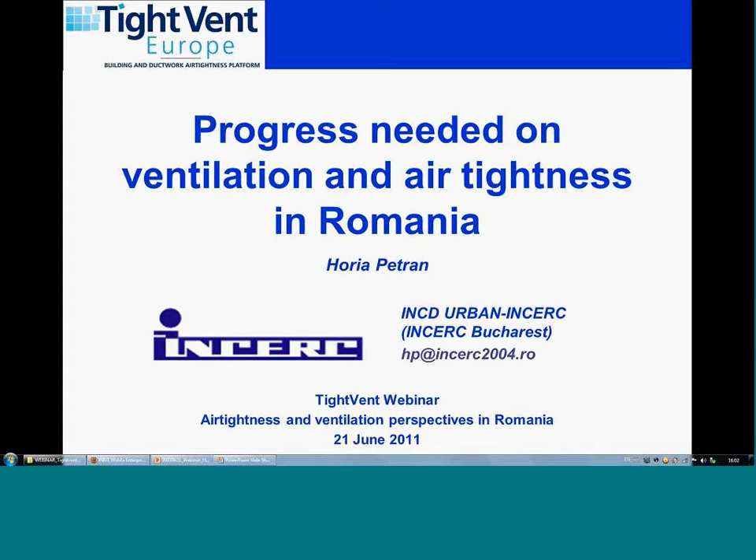The content of my presentation will focus on 4 major issues: the airtightness of the building stock in Romania, the potential impact of ventilation on energy performance of buildings, numbers on Romania, the envelope permeability, indicators for quantitative and qualitative evaluation, and testing methods and current investigations used.

The second one: ventilation use issues in rehabilitation programs. In the activity of improving energy performance of existing buildings, the context and the schemes used for the national thermal rehabilitation program, the key actors involved and their influence, and the impact on air quality.

The ventilation of low energy buildings and nearly zero energy buildings is, as you may know, very important. I will try to emphasize some requirements and the weight of ventilation in the energy balance compared to the current practice in our existing buildings, and what solutions we can imagine for this kind of buildings.

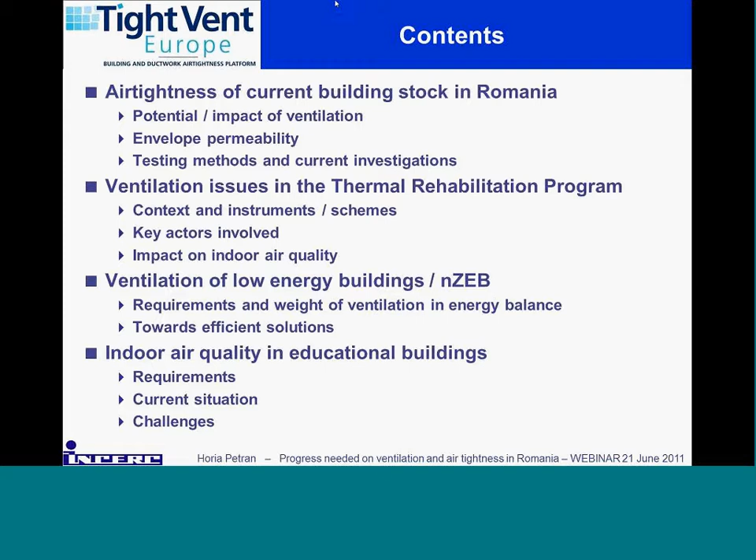Last but not least, indoor air quality in educational buildings, which is a very important issue: what are the requirements for this kind of buildings, the practicalities, the current situation, and the challenges, equally for energy efficiency and for indoor environment.

First of all, in order to evaluate the potential impact of ventilation on energy performance of buildings, one should take a global look at the numbers related to the building stock in Romania.

According to the Romanian National Commission for Statistics, a total of approximately 8 million housing units exist in Romania, serving a population of more than 22 million people.

The total residential buildings number around 5 million, with a total useful area of more than 450 million square meters. Of the 8 million housing units...

3.1 million are situated in around 84,000 blocks of flats, which make up 70% of the building stock, primarily located in urban areas. These building blocks make up, as I said, 70%.

These figures evince the great impact of retrofitting buildings in order to reduce energy consumption.

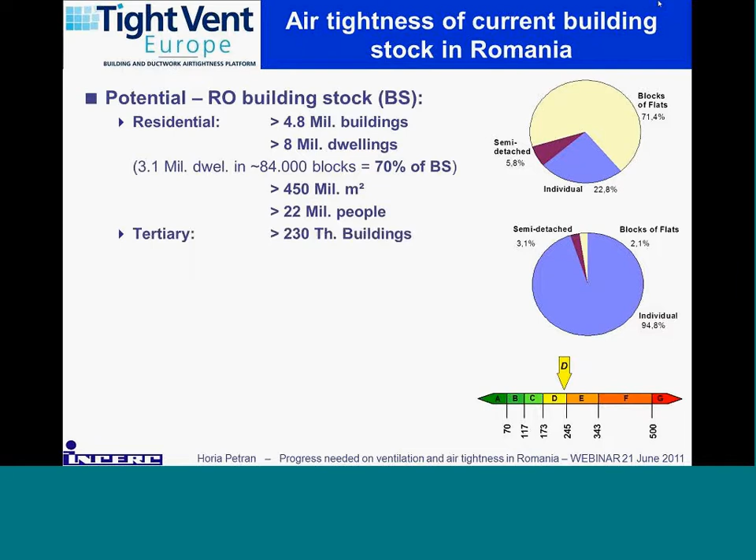The non-residential building stock consists of more than 230,000 buildings, serving more than 70 million square meters.

The energy performance of the building stock varies between 100 and 300 kilowatt hours per square meter per year, depending on the building type and climatic conditions.

It's necessary to say that Romania has 4 very different climatic zones, with extreme design temperature for winter between -12 and -21 degrees Celsius, and yearly average external temperature between 3.6 and almost 12 degrees Celsius.

Analysis of urban buildings and their energy efficiency, performed with the strategy of Bucharest, focused on more than 800,000 dwellings plus non-residential units, showed that the global energy consumption for space heating alone is around 8 terawatt hours per year.

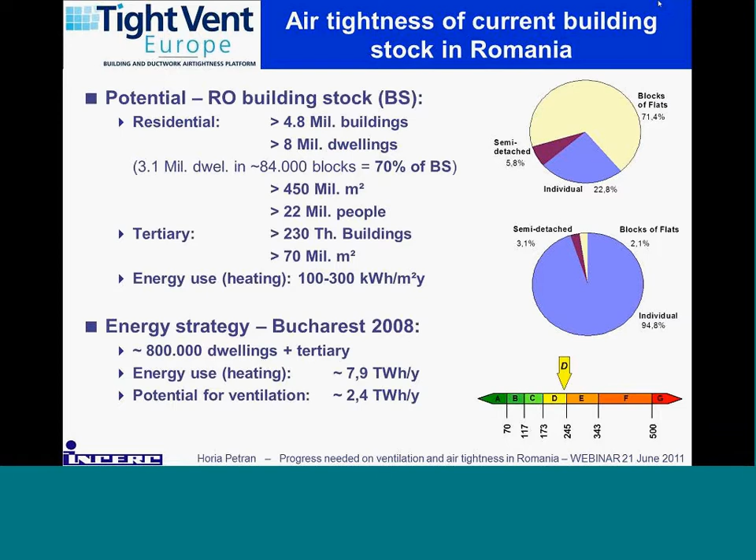Taking into account the usual ventilation share in the energy consumption for heating, we can estimate that more than 2 terawatt hours per year in Bucharest alone can be of major interest.

Most buildings do not have mechanical ventilation. Infiltration is the dominant source of ventilation for dwellings in Romania. With the exception of very limited kitchen or bath exhaust systems, most buildings in Romania do not have mechanical ventilation, and therefore they rely on infiltration, leakage, and natural ventilation through window opening in order to maintain acceptable indoor air quality.

On average, over long periods of time, for building stock with existing windows, the requirements of fresh air can be met, but uncontrolled infiltration leads to very high energy consumption and sometimes thermal discomfort due to cold drafts. On the other hand, for buildings with airtight windows, indoor air quality is often not ensured by envelope infiltration, with bad consequences such as moisture condensation at thermal bridges causing the formation of molds, which affect the health of occupants and building materials as well.

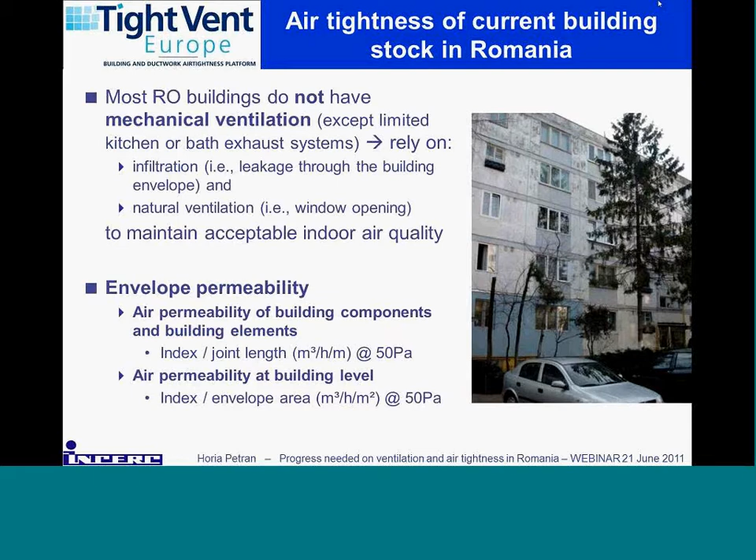Regarding envelope permeability, this is usually expressed by indicators like air permeability of building components, an index normalized to joint length at 50 Pascal pressure difference, or at building level, an index showing permeability reported to the envelope area, also at 50 Pascals, or reported to conditioned volume as air changes per hour.

There are many more or less standardized testing methods and investigations used for assessing the permeability or tightness of the building envelope. The most well-known is the blower door test, the fan pressurization method. Thermal imaging, or thermography, is also used as a qualitative investigation to detect air leaks. There are also various ventilation system functionality surveys and surveys on indoor climate.

The blower door test is sometimes limited by the costs of implementation and the relevance of the results. If we're talking about condominiums, collective buildings, where the air exchange of the apartment with the external environment is made through the staircase, which is a common volume to the building, shall we test the whole building, or find a representative apartment for testing?

Tests performed on 79 windows in the laboratory for thermal protection of buildings within INCERC showed a large variation of air permeability index, limited to less than 1.5 cubic meters per hour per meter of joint length at 50 Pascals. The average is around 0.50, and these results are characteristic for the current insulating windows market, not for the existing building stock.

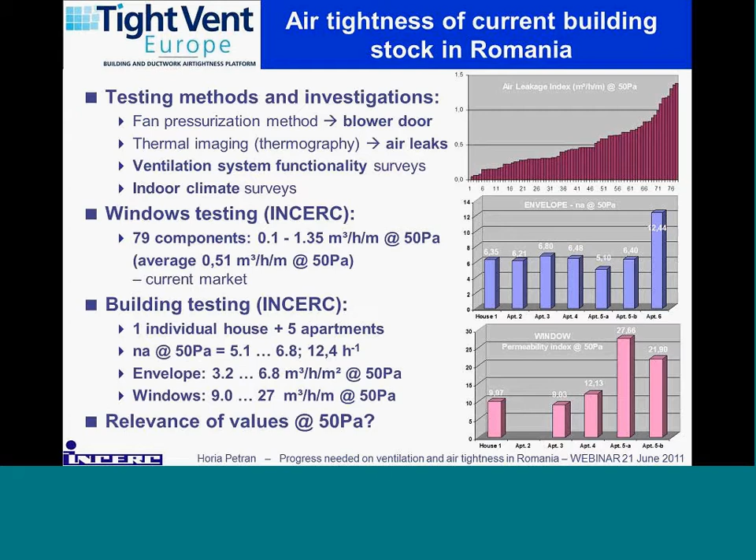For the relevant issues in the thermal rehabilitation program, as context, there is an overall need to increase energy efficiency in Romania as well as in Eastern European housing, where in Romania the building stock for housing is more than 95% private ownership. This is a broadly recognized fact. Although solutions for this issue exist, they are often executed in chaotic and unregulated ways.

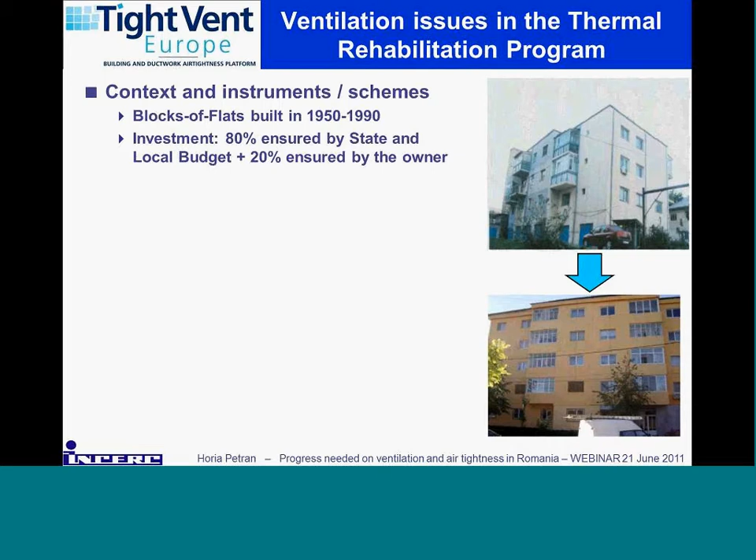Starting in 2002, an ambitious national retrofitting program targeting energy performance of buildings was launched in Romania, supported until now by general state and regional subsidies. More than 80% of rehabilitation works and 100% of energy audit and design activity are financed by the state. However, priority is given to improving thermal insulation, while the indoor environment with regard to comfort, health, accessibility, safety, and so on, but primarily indoor air quality, is somehow neglected by not providing any subsidies for that.

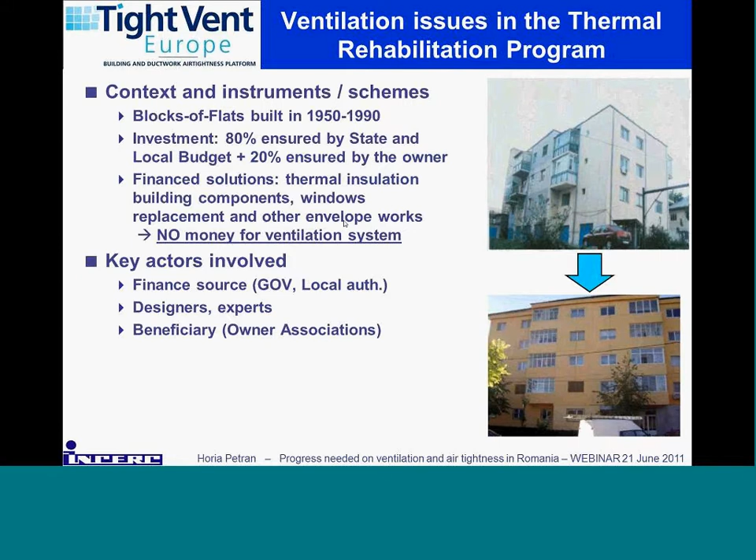Major key actors involved in the rehabilitation process should be aware and trained about the importance of ventilation issues and risks, and also about the impact of bad ventilation on indoor environment quality. I have confirmed in many cases that indoor air quality was lowered while thermal insulation and air tightness were improved. With increasing concern about energy consumption and conservation, building envelopes are becoming more airtight and consequently contributing to an inadequate environment.

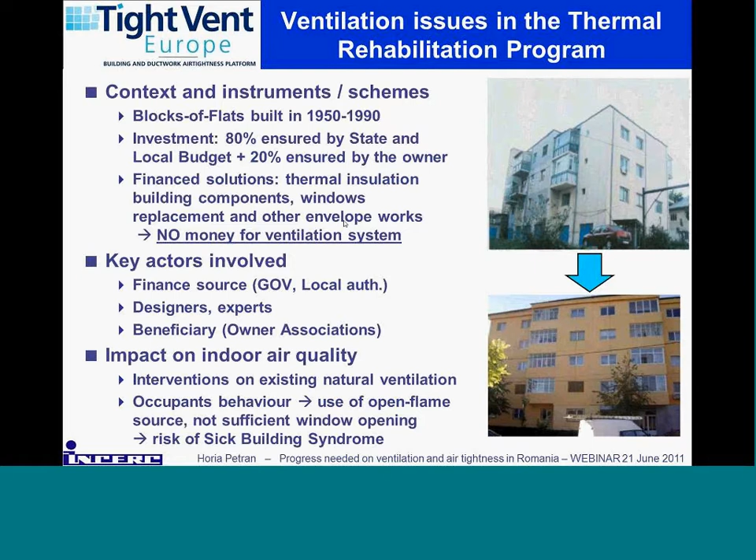Actually, the need for natural ventilation is not taken into consideration when increasing the airtightness of the building. Now, I'm afraid, serious problems have surfaced concerning the indoor environment and air quality. Those problems are increased by the behavior of occupants trying to cut down heating costs. They use alternative fuels, even open flame heating sources including cooking machines, which increases moisture condensation and the concentration of harmful gases like CO and CO2. The additional emissions from surface materials like furniture and finishings, in the context of irregular or no ventilation of occupied living space, cause an increased incidence of sick building syndrome.

From the crude reality to the far bright future, as building very low energy buildings, very efficient buildings, passive buildings, and nearly zero energy buildings. What is very important to emphasize, and it was also emphasized before,

these would have a very tight envelope. They should ensure a controlled ventilation, especially in highly airtight buildings, the airtightness of that ductwork to be ensured by appropriate technologies and skilled installers also. The heat recovery efficiency should be more than 80%, and this is a must.

Another aspect of these buildings is related to the weight of ventilation in the final energy use of the building. For example, for a typical existing residential building, the weight of ventilation in the energy use is in the range of 15, maybe 30%. For a very low energy building, this can be more than 50%, which increases the need to properly solve the energy efficiency in ventilation systems.

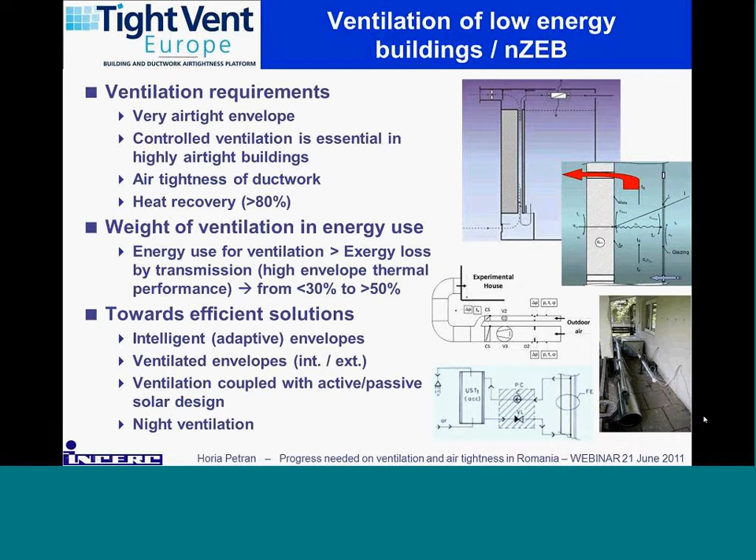So just pointing out some efficient solutions. First of all, it's a ventilated envelope system. It's a concept of wall with parietal dynamic effect on the exhausted air from the occupied spaces. The functional principle is quite simple.

In the winter and during the night in summer, the air to be evacuated from the occupied spaces is circulated by the air gap, which is formed within the wall by applying a very common low resistance layer like a gypsum board. During the night in summer, the external cold air from the outside is intensively circulated through the air gap, providing in this way a cooling surface to the conditioned area. In fact, the variable envelope thermal resistance is very high in winter and very low during summer nights.

So this is what I said about the adaptive envelopes. Another solution is a ventilated solar space, which is applied in the experimental house within INCERC and was studied there some years ago, which is used for preheating ventilation air mainly during the heating season.

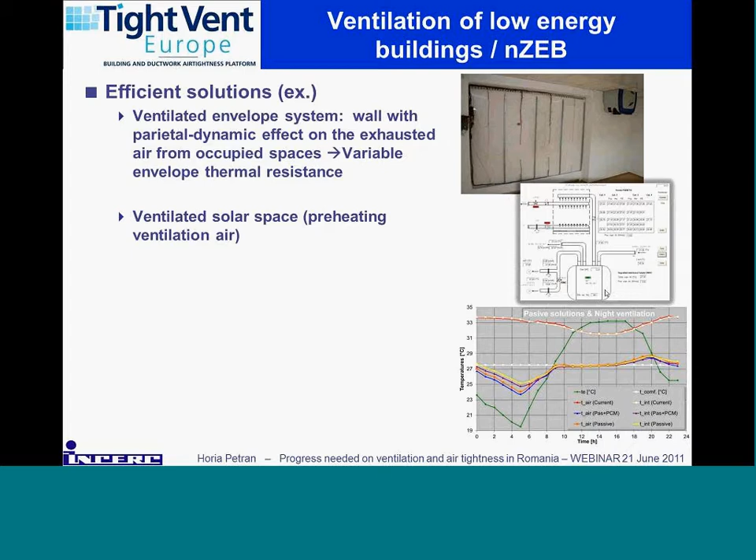Another solution should be the use of active or passive ventilated facade, as well as for new buildings and for refurbishment solutions. One idea is to use PV panels as active covering and preheating the fresh air while cooling the elements of the photovoltaics.

Other solutions should be the use of so-called passivation solutions to increase the energy performance of a building and simultaneously use night ventilation in summer. Night ventilation can be used for cooling passive and active elements like building mass, activated building systems, and use of phase change materials. If you look at the graph below,

this is presenting a thermal response of a top floor apartment, southwest oriented, on a typical day of July in Bucharest, taken from the reference year. Compared to the 32-33 degree real situation, the application of very simple passive solutions with a proper ventilation strategy can lead to acceptable comfort without cooling energy. This test includes also the PCM effect.

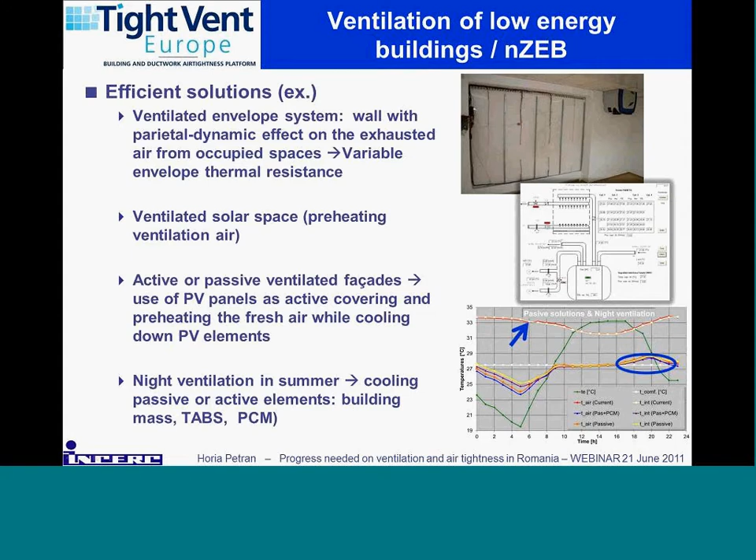Moving forward to a very delicate aspect, which is ensuring indoor environment in education buildings. What is to say is that ventilation practice for occupied spaces in schools or public buildings differs from those for residential buildings.

Studies on indoor air quality, ventilation, and building-related health symptoms in schools have shown that ventilation is not adequate in many classrooms and was considered the main cause of health symptoms. Moreover, other research shows that poor indoor air quality in schools can cause a reduction in students' performance, whereas good quality in classrooms can enhance children's concentration and also teachers' productivity.

Therefore, the ventilation requirements are focused on minimum airflow per person, and ventilation needs are in reality much higher because of people concentrated in closed spaces over extended periods of time, and the ventilation rate has to be assessed for adaptation to the dynamic occupation. So there is a need for intelligent ventilation systems and for energy efficiency, and in this respect there is a need for low ventilation during long breaks and holidays.

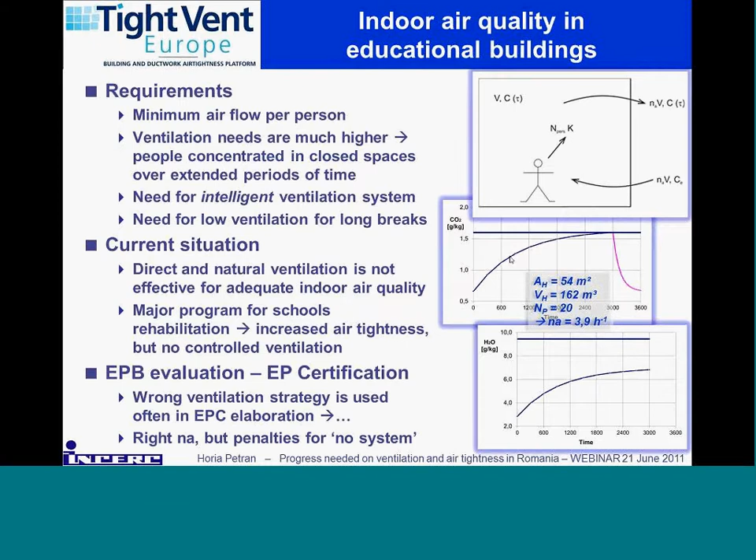The main challenges for ensuring a high quality environment in educational buildings are, for energy performance evaluation, to detail and clarify existing regulation on ventilation and energy performance certification, which is not very clear right now. And for the key actors involved - architects, engineers, designers, energy auditors, inspectors, and all technicians - to ensure the needed qualification level and proper knowledge on ventilation impacts.

If we're talking about government, the Ministry of Education, the local authorities managing the rehabilitation program for schools, the inspectors, the teachers - raising awareness is needed, which in this particular case of educational buildings can generate further impact on education.

Last but not least, one of the key actors is the building workforce. It needs to ensure the necessary skills. Just to mention, the Building Workforce Initiative from the European Commission, call for Build Up Skills, is undergoing now, and we hope that we will have a national project on Build Up Skills for the workforce in buildings.

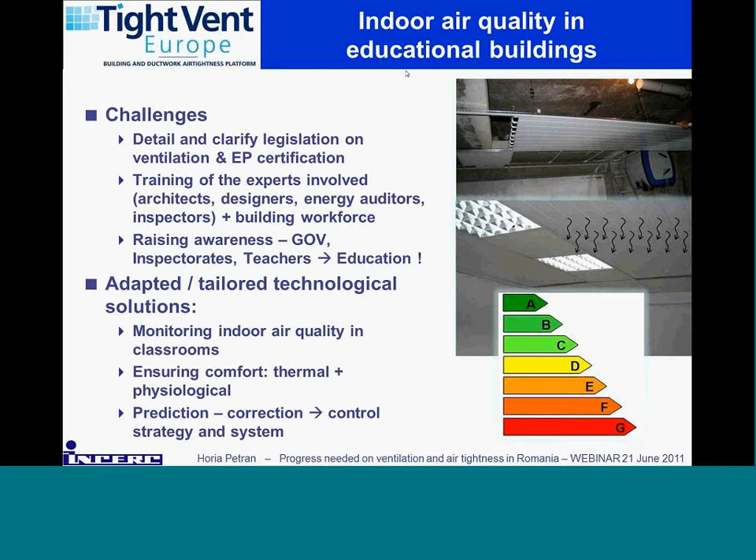In conclusion, there is a significant potential for ventilation in order to improve indoor environment quality in Romania and also to reduce the energy use in the existing building stock.

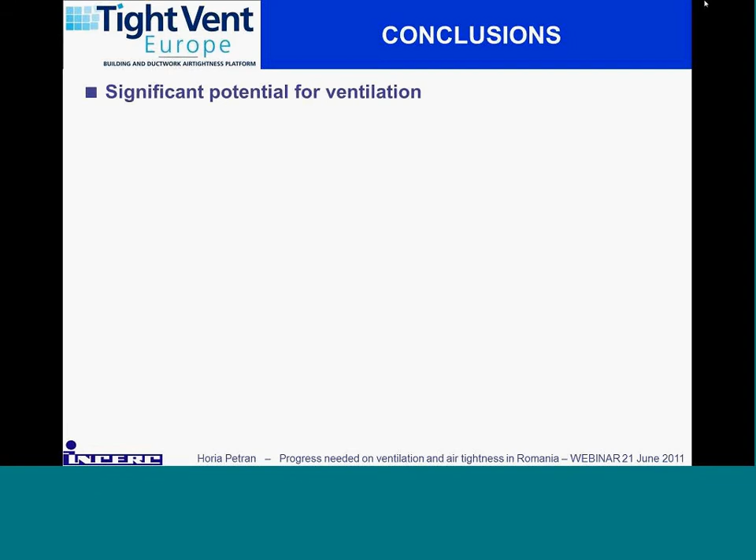We cannot speak only about one identified problem with only one potential solution. From the envelope permeability point of view, there are two main issues: uncontrolled infiltration leads to low energy performance of buildings, and the combination of an airtight envelope with irregular or no ventilation, together with occupant behavior, may lead to sick building syndrome. For low energy or zero energy buildings, the combination of ensuring correct ventilation and use of adaptive envelope solutions, including connectivity with HVAC systems, are the solutions that should be sought.

Within the existing and future rehabilitation schemes, indoor air quality has to be a high priority, which is not now, together with other aspects like stability, energy efficiency, safety, functionality, acoustics, and so on.

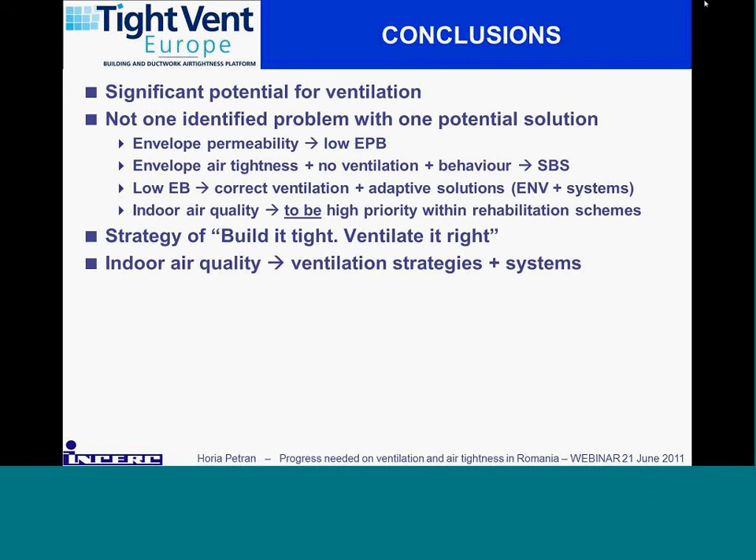The strategy of 'build it tight, ventilate right' apparently has many different meanings depending on the context, but basically it's a sound starting point, and all approaches should be based on this concept: indoor air quality obtained using the right ventilation strategy and using proper systems.

Ensuring the right ventilation in schools is of utmost importance. It is very important to identify when low energy systems are needed in order to obtain high energy performance, and this should be done with systems which ensure ventilation efficiency and indoor comfort, for example, by mixed radiative and convective heat transfer.

For net zero, nearly zero energy buildings, the solution package contains efficient heat recovery, balancing, passive strategies or activation strategies, use of night ventilation, free cooling, use of materials, renewable sources, and so on.